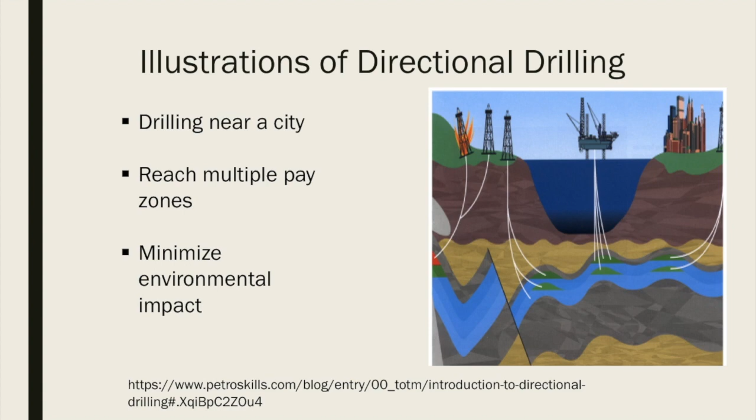Another great aspect of this picture is that it shows multiple holes stemming from one hole. Companies will save money by tapping more pay zones and only drilling one hole. They will also reduce their environmental impact. This is a really exaggerated illustration, but I thought it served a great purpose.

So now let's get into how holes are made. It all starts with the bottom hole assembly. There are many components to the assembly, but I'm only going to mention a few. The first one being the GPS. For obvious reasons, the GPS is crucial to the operation because it lets the operator know how deep they are, how much further they need to go, when they need to make an adjustment.

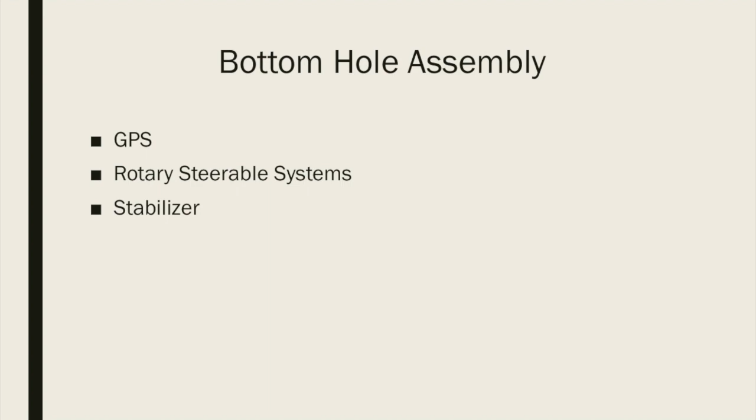Next, we have the rotary steerable systems. The operator has direct control and can maneuver the drill bit manually. He's able to deviate in a few different directions with minor degree adjustments. Next, we have a stabilizer. The stabilizer is located on the drill pipe and keeps the drill from deviating away from the path.

Finally, we have the measurement while drilling tool. The MWD is a crucial sensor of the operation because it provides feedback to the operator, letting them know how fast they're drilling and what kind of vibrations they're experiencing. These aspects are crucial because they can determine the drilling method used as well as the change in the bottom hole assembly.

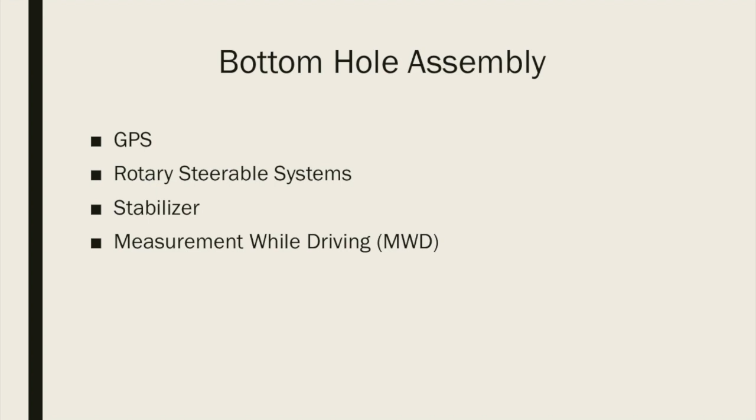Here's an illustration of what the bottom hole assembly looks like. Notice you have a stabilizer located on the drill pipe. This is to keep the drill bit from deviating in any other direction other than the direction noted by the operator.

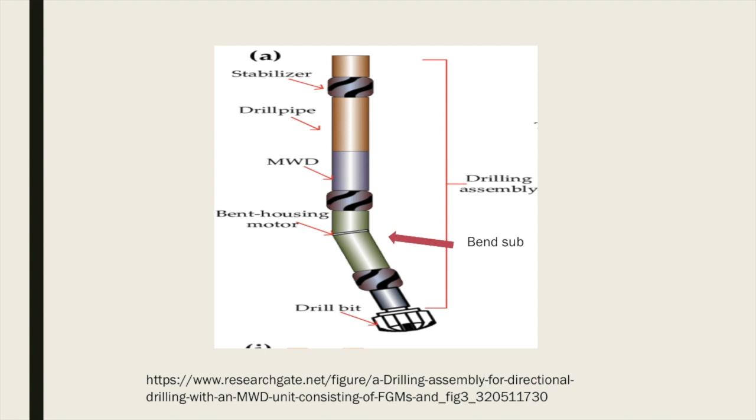Also notice that there is a bent sub. This bent sub is there in order to create turns and to create trajectories for the operator. I will mention a few methods on how this is used in the next slide. So now that we have an idea of the drilling equipment used, let me talk about some of the methods used to create these turns.

Push the bit. This uses the bent sub mentioned previously to push off the sides of the wall of the hole to direct the drill bit in the desired direction by an operator. Once the operator creates this turn, the turn is now referred to as the drill kickoff.

Point the bit method. This uses a rotary steerable system that is manually controlled by an operator to turn the bit in a direction. The operator will maneuver the bit until the drill kickoff is created.

Next, we have whipstock. This method is when you drill a hole and you take your drill out and you insert this whipstock and you reinsert your drill. Now this whipstock is special because it contains a curve. Now the drill will follow this curve and create that drill kickoff.

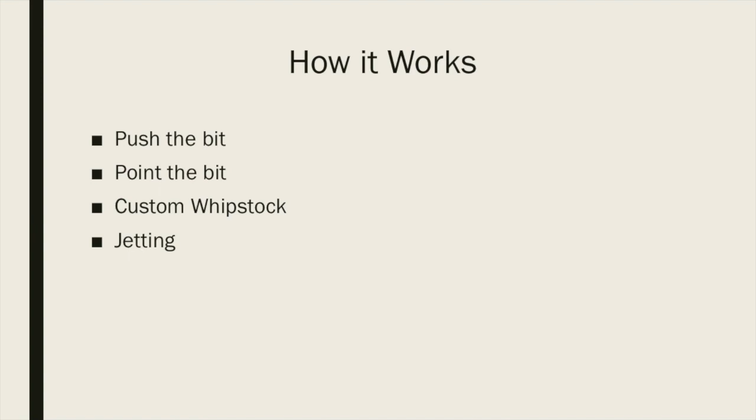Lastly, we have jetting. Jetting is when the drill bit nozzle releases high pressure fluid that clears the path for the drill bit. Jetting is also combined with the push the bit method. Here's the angle that I was talking about for the whipstock. You can see the drill head just follows that path and gradually creates that curve.

Here's an illustration of what jetting looks like. I will show you a better video later on. As you can see, the drill bit releases a high pressure fluid and the drill head just follows. It's also important to know that the drill head is not spinning at this time. The only action happening is the jetting fluid.

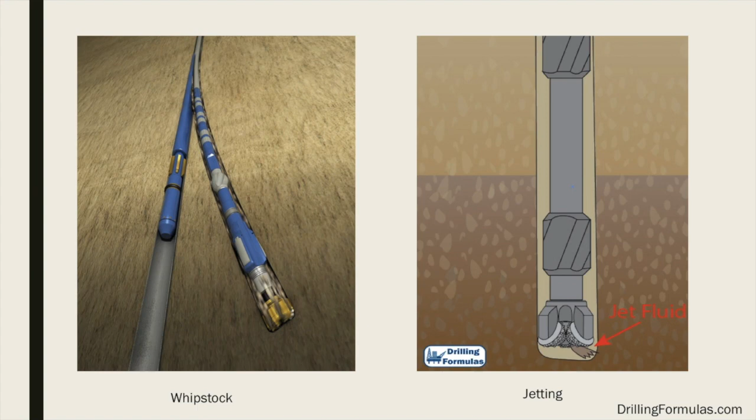Here we have push the bit. You can see that the bent sub is directly pushed up against the wall, creating an angle which the drill bit can approach. Here we have point the bit. The point the bit contains a shaft that the operator has direct control over. Now the operator can't turn 90 degrees, but he can turn 5 degrees and gradually make a curve.

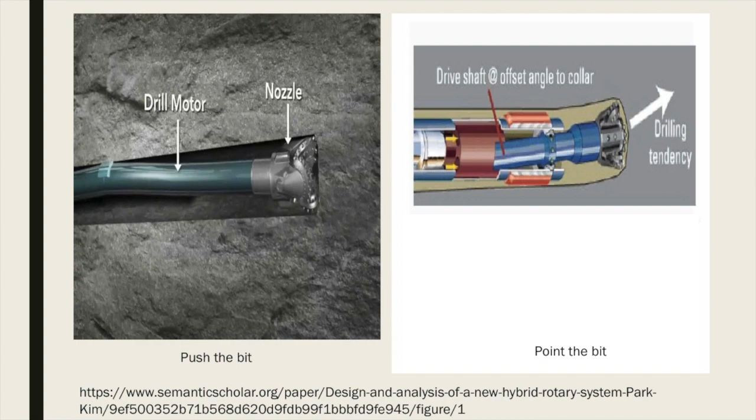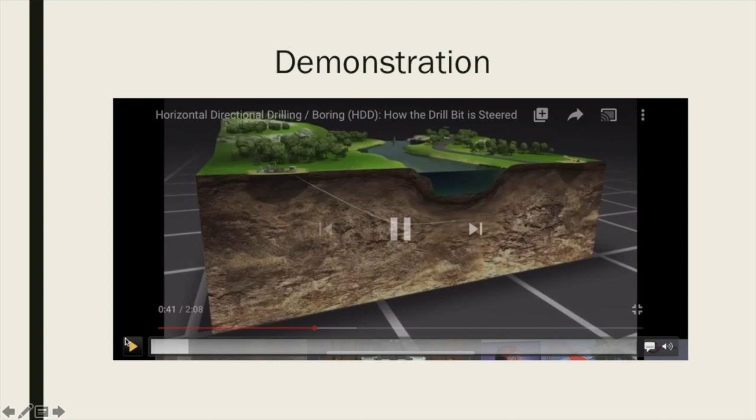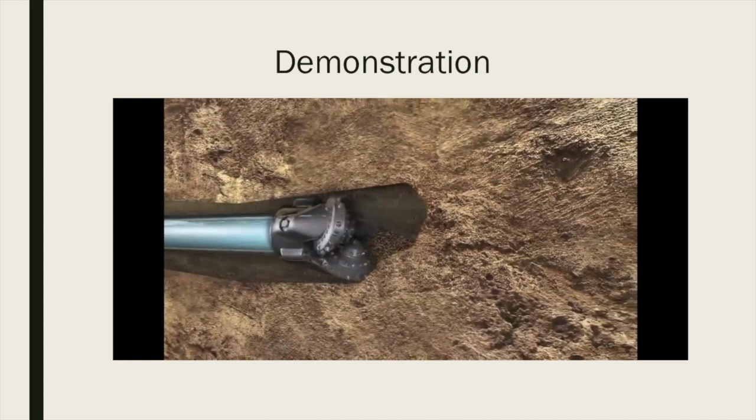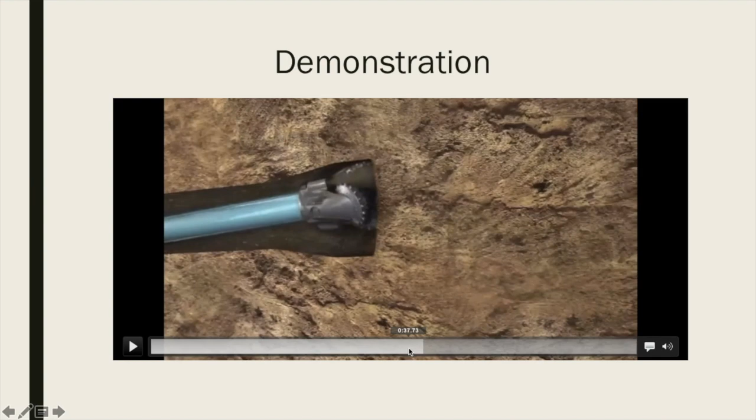Now I could talk about the drilling assembly and how the turns are made all day long, but I wanted to show you this video because it provides a visual representation of what I've been talking about. I hope you now have a better idea of what I've been talking about.

So in summary, horizontal drilling can't be covered in 7 minutes, but I just wanted to cover the main components as well as the main methods used in creating turns. This process begins with the components of the bottom hole assembly. Once the drill is in the ground, the feedback from the assembly will let the operator know if any additional adjustments need to be made. Once additional adjustments are made, the drill bit will be on path to create a drill kickoff.